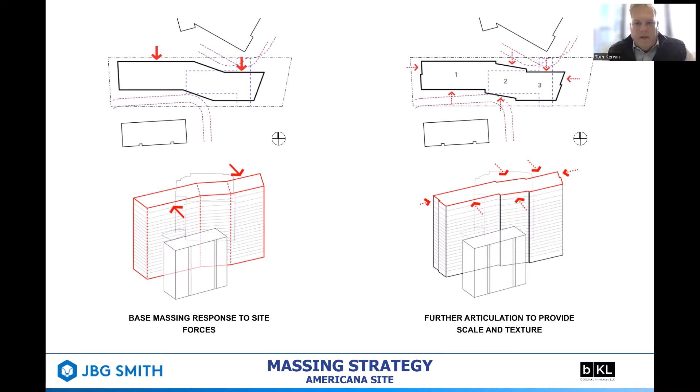As described earlier, the site is rectilinear in shape, oriented east-west, bound by Eads to the west and Richmond Highway to the east, with existing buildings to the north and south. These diagrams describe how the building came to be shaped, in compliance with the sector plan: 60 feet from existing buildings to the north and south at the tower, and 40 feet at the podium. We believe this requirement also adds to the richness of the form and massing of the building.

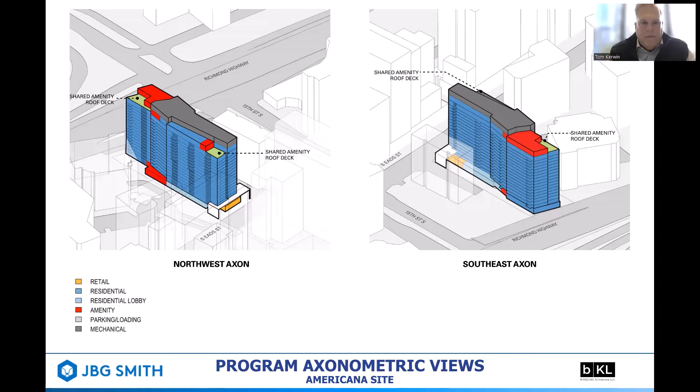The uses include retail at the base, holding the Eads Street elevation at grade. We'll go into further detail about the pedestrian experience along Eads and eventually along Richmond Highway. Multifamily residential sits above a podium of amenity, retail, and lobbies, with an articulated top allowing for outdoor space, amenity space, and screened mechanical space to improve the skyline as required by the sector plan. The podium, middle, and top are introduced as required, with changes in materiality, articulation, and setbacks at the top of the building.

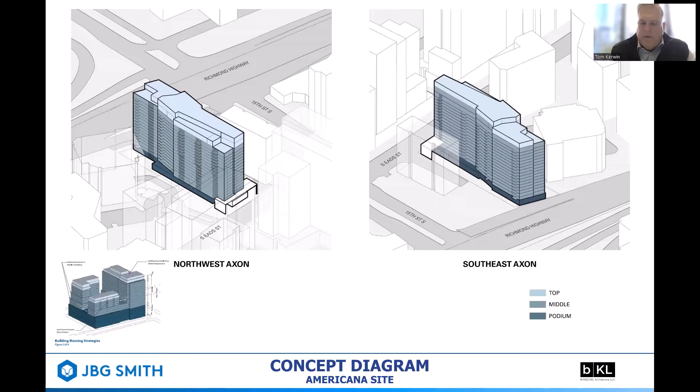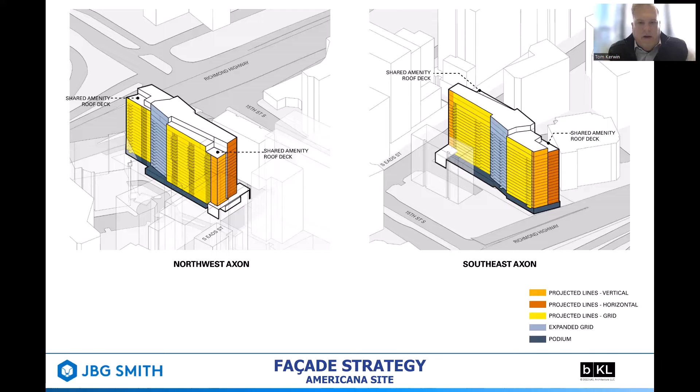The skin of the building, the fenestration and exterior wall, is formed by the orientation of each facade, horizontal and vertical expression, and an expanded grid at the massing shift, indicated in lighter blue, to further break down the massing and provide richness of materiality, color, and fenestration.

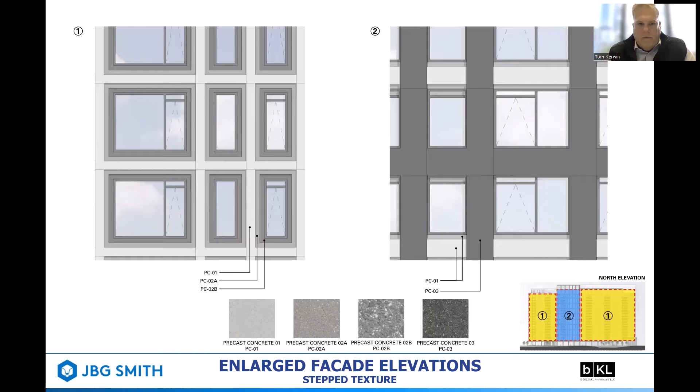We have two major zones on the north and south elevations, depicted in the lower right diagram. The majority of the skin has a gridded condition of white and grays, highly articulated and very visible along Eads and Richmond Highway. The center vertical zone of the facade breaks the horizontality of the building and provides a larger grid of darker gray, signifying the shift in massing and providing relief to the building's length by breaking it with this vertical element.

The east and west elevations are narrow. These narrow faces are further broken down with horizontal and vertical expression of the precast, and the grounding of the building at the base on both elevations.

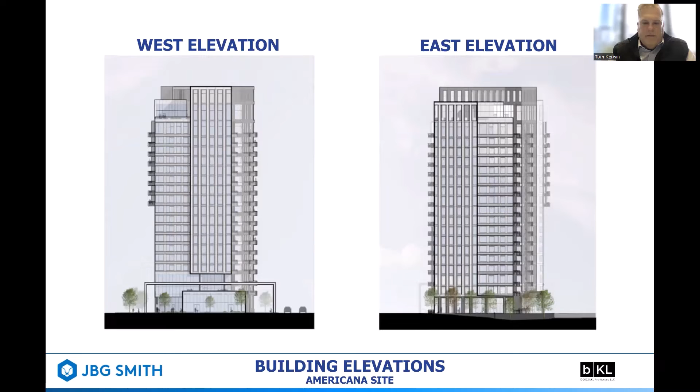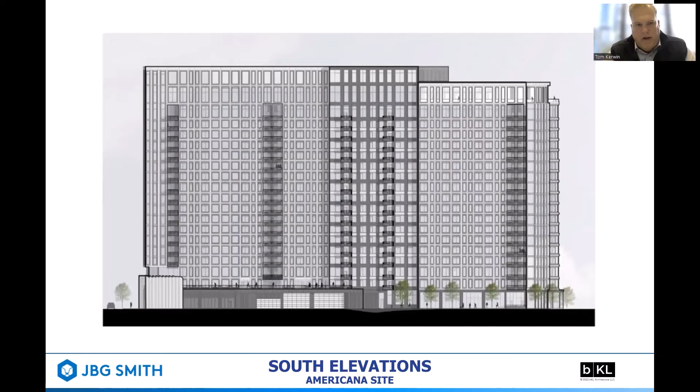The long elevations again depict the base, middle, and top, with an articulated top and grounding of the building via darker precast. The grid marches across the elevation but is broken by the larger, darker grid, with balconies introduced in places we believe are visually attractive from outside, allowing view corridors past the existing buildings while also working well with the unit planning inside.

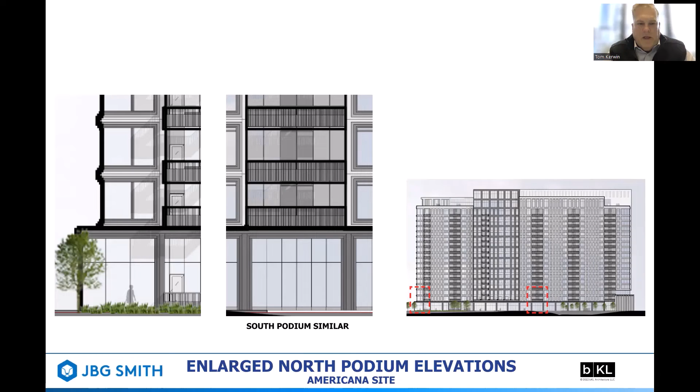A detailed view of the podium shows how the balconies are integrated into the design with the darker precast expression, the balconies featuring a lighter rail expression juxtaposed against the more solid precast.

The detail along Richmond Highway again shows the building grounded by the darker precast, with more detail to be provided later regarding both the existing condition of Richmond Highway and the proposed lowering of Richmond Highway.

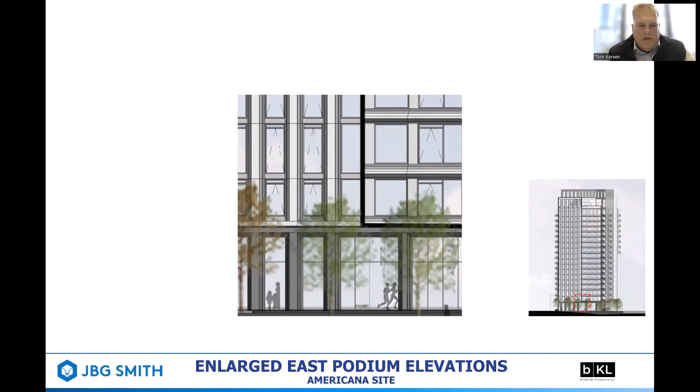The balconies project out in certain areas where views over the tops of existing buildings provide longer views and more ample outdoor space for the units above.